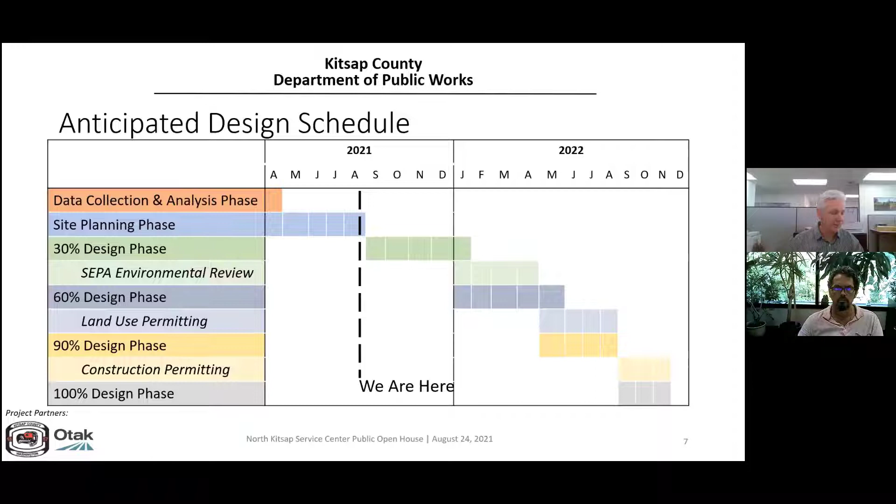So this is the schedule that we showed back in our first open house back in April. That time we were coming around to finishing the data collection analysis phase. As you'll see here in the blue Gantt bar chart, we're in the site planning phase. We're nearing the end of that phase here in August. And here's the subsequent phases. We'll get in this a little more detail: 30% design, 60, 90 final design, and the permitting that goes in between there.

So the first phase we talked about, the data collection and analysis phase, that's pretty much completed. So the deliverables, just a fancy word for reports and technical memoranda, that are completed include the preliminary geotechnical engineering report, conceptual hydrogeologic model report, critical area study, cultural resources assessment, and the zoning memorandum. So I'm going to talk a little bit more about the key findings in each of those reports and memoranda.

You may have some questions, and we can try to address them at the end. I am not the technical expert on all these discipline reports, but I do have an understanding of quite a bit. These reports will be on the county project website, so you can look at them in more detail.

So the preliminary geotechnical engineering report is prepared by Aspect Consulting, the geotechnical engineer on the Otak team. The findings are that the site is covered with shallow topsoil atop Vashon Till. Vashon Till is a low permeable soil, so water doesn't travel through it very fast at all.

One of the key findings is that it's not really suitable for stormwater infiltration, which is a preferred method to convey stormwater once it's processed on site. From a structural standpoint, foundations can be conventional. It's good for building foundations and other slabs, typically excavating down about 3.5 to 5 feet below ground surface, which is what BGS stands for. And the site soils can be used as structural fill.

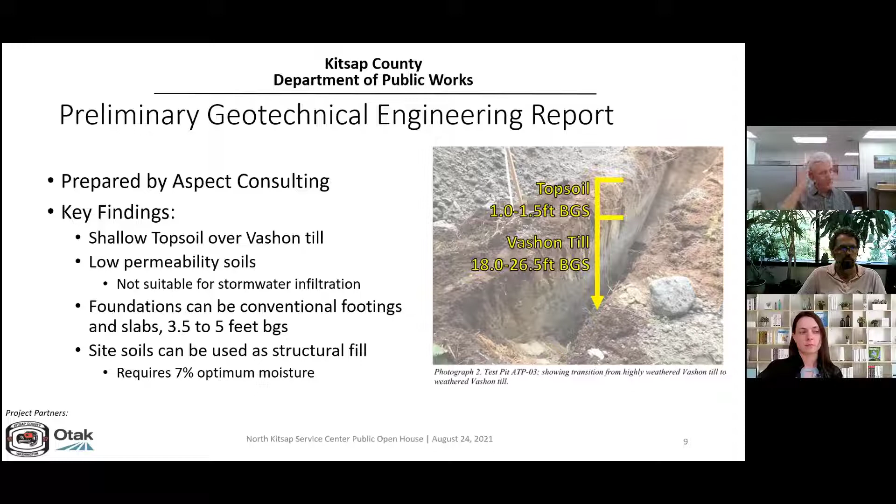So there'd be cut and fill happening on the site. Excavated materials can be used as fill, provided they meet the 7% optimum moisture. We're going to have to direct the contractor during construction to process those soils accordingly to get them to the optimum moisture. Some of the soils are up to 24% moisture now before they're placed, compacted, and graded.

So the conceptual hydrogeologic model report, again prepared by Aspect Consulting, informs engineering design much like the geotechnical report, but from a little bit different perspective. It used the same 8 test pits and 3 soil borings that were used for the geotechnical report, which gets a little bit different data, plus it uses publicly available regional data.

And there are future site activities that will require BMPs, otherwise known as best management practices, to protect the aquifer. So I'll go over just a couple of those.

Secondary containment and leak detection is required for petroleum tanks, above-grade petroleum tanks. The moderate risk waste facility needs a fire suppression system, and in the unlikely event of a fire in the future, it needs to hold about an hour's worth of fire suppression water, about 15,000 gallons, so there'll be a tank to hold that water. There will also be other tanks on site, such as diesel exhaust fluid, chip seal tank, brine tanks, and salt, so the containment needs to be appropriate for those uses.

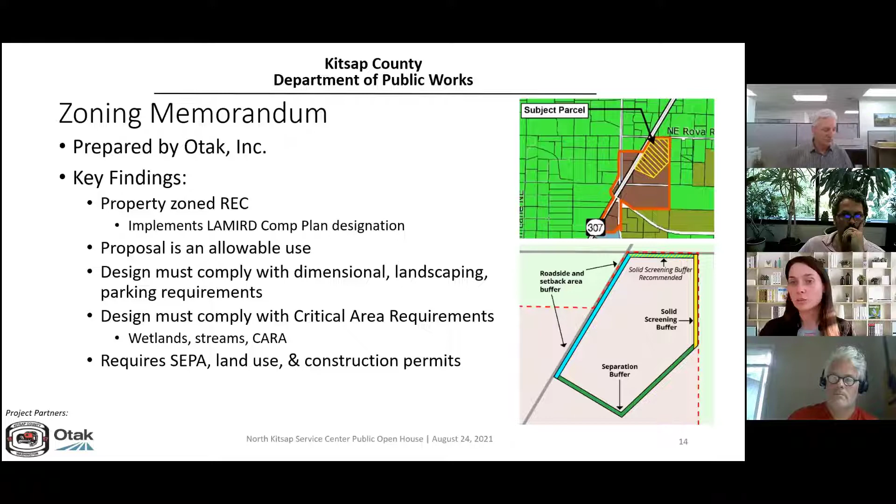All right, so that pretty much wraps up the key findings from the data collection and analysis phase. So like I said earlier, referring back to that schedule, we're closing in on the end of the site planning phase. So the activities we performed was confirming site and building program.

It's basically the plan and an inventory of the types of facilities that are needed on the site, both for household hazardous waste and road maintenance facilities. And so we confirmed the preliminary programming done by TCF Architects. That was done some time ago.

Mark and the team prepared 2 conceptual site alternatives. We have had some consultation with regulatory agencies. It's pretty much been limited to critical areas so far.

And as far as the deliverables go, there's the site plan alternatives analysis tech memo. We had a draft of that, submitted it to the county for their review a few weeks ago, August 4th. So some of the things that it highlights are the relative differences between the 2 site alternatives.

From the standpoint of different disciplines, it could be civil engineering, it could be landscape architecture, those types of things. It includes the decision matrix to help the team make a recommendation to the county, to help the county choose the preferred alternative, and it includes a relative cost estimate between the 2.

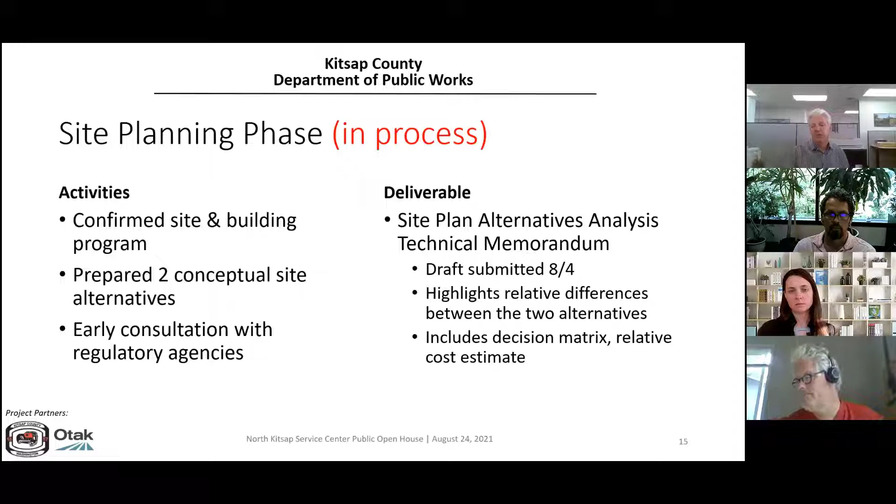So with that, I'm going to turn it over to Mark, and he can go in more depth about the 2 site plan alternatives. Thank you, Jeff. Appreciate that. Yeah, we've developed 2 site plan alternatives, and the way they're laid out is conceptually the same between the 2 alternatives. So I'll go over that.

They share a common spatial organization. On the northwest lower corner, a household hazardous waste facility is placed there for proximity to Bond Road, and visibility for residents to see. That area is intended to be accessed by the public and used by them. There is fencing that separates it from the remainder of the facility.

That is the most active portion on the site, and so we've located that as far away from adjoining neighbors as our site boundaries would allow. And then to the north is the maintenance facility and administration area.

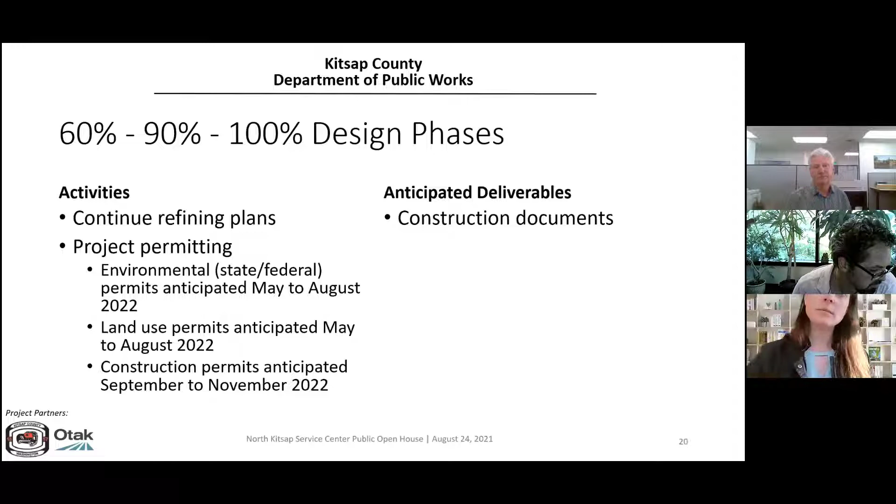Wanted Christina to go into a little more detail in terms of the open houses associated with the schedule. Yes, so there are still quite a few opportunities for public engagement throughout this process.

We mentioned at the beginning that the first open house, which was really a status update, was back in April, and here we are at our second open house in August. Going forward, we're planning additional open houses when our preferred alternative has advanced to 30% design, then from 30% to 60%, at 90% design, and prior to construction commencing.

In addition to the open houses, there are public comment periods you'll be able to participate in. We're proposing to start SEPA a little early after 30% design documents are available, and there's a public comment period associated with that. You're welcome to submit comments during the SEPA environmental review process. We also believe we'll need a land use entitlement with its own public comment period, and you're invited to submit comments when the public notice of application goes out.

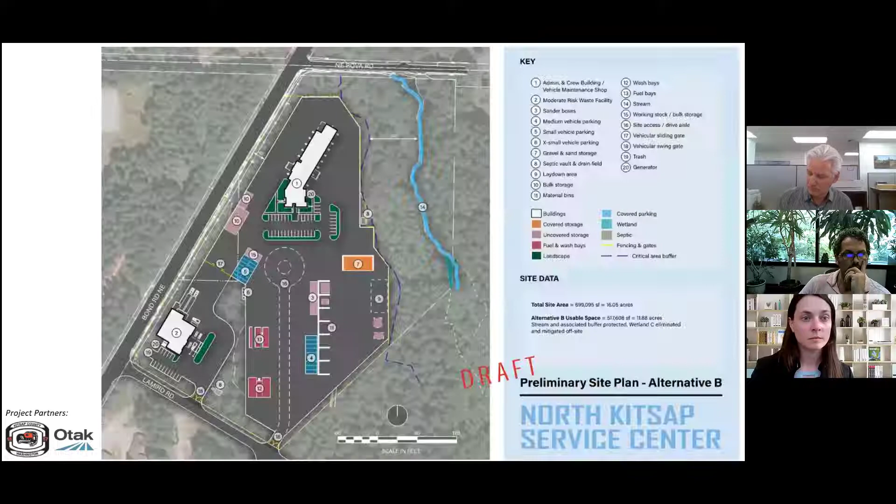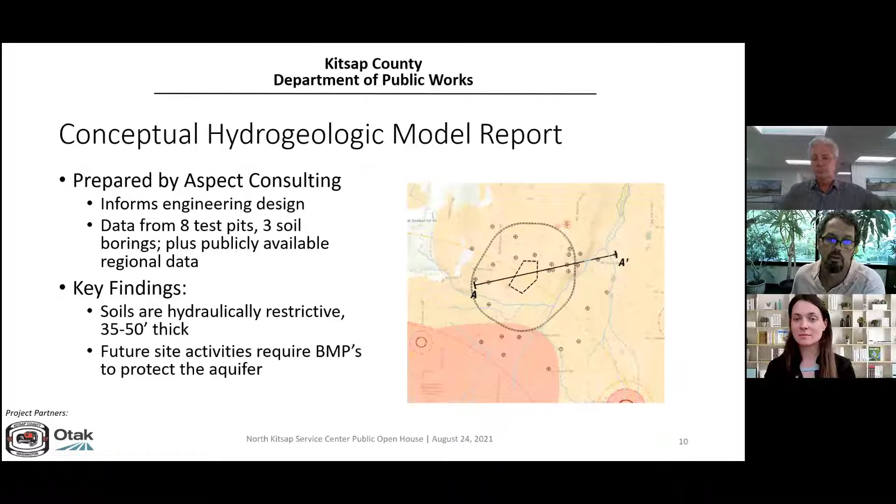Just state your pros and cons, your feelings and thoughts as you read through the reports—that'll help you state your position and argument as well. And those are feedback.

From an environmental point of view, I don't think you can ever take something Mother Nature's built and decide you can take it away from one site and build it somewhere else. I think that's always foolhardy. So I'm wondering how the county's going to view the possibility of taking out that wetland C and trying to move it somewhere else in the county, the state, or wherever it's mitigated to.

Speaking to that, it wasn't our intent to mitigate off-site—we were looking to mitigate on-site if we were going to affect wetland C. But as we studied the site, with the critical area setback to the stream and wetlands, the enhanced buffers, and everything you see on this screen, we understood it's going to be hard to mitigate on-site. So we searched for a mitigation bank, and surprisingly there's one down the road in the Gamble Creek watershed. So if we chose to mitigate off-site, it would be in the same riparian corridor, which we thought was a benefit.

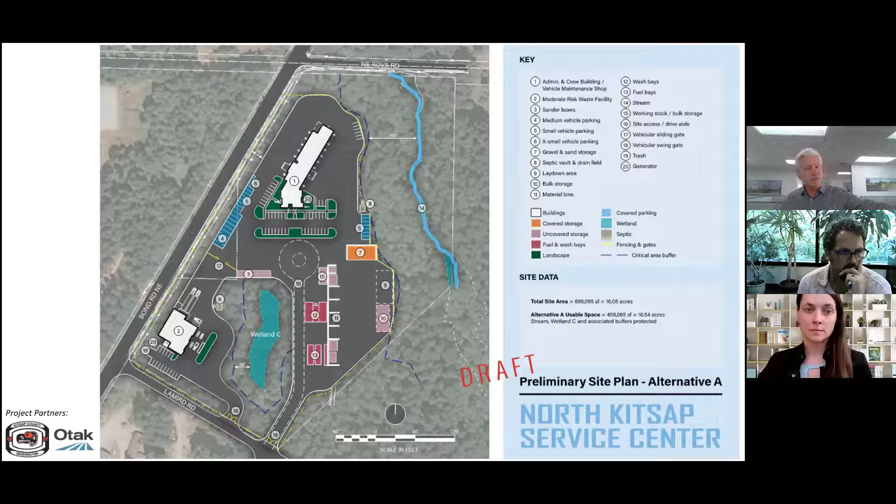As Mark said before, the main difference between alternative A and B is that alternative A leaves wetland C and its buffer alone, with some buffer averaging proposed. Alternative B does not leave wetland C and its buffer intact, obviously giving more space. So if alternative A is the selected alternative by the county, you leave wetland C and its buffer alone — you stay out of there.

Does anybody else want to clarify further on my statement?

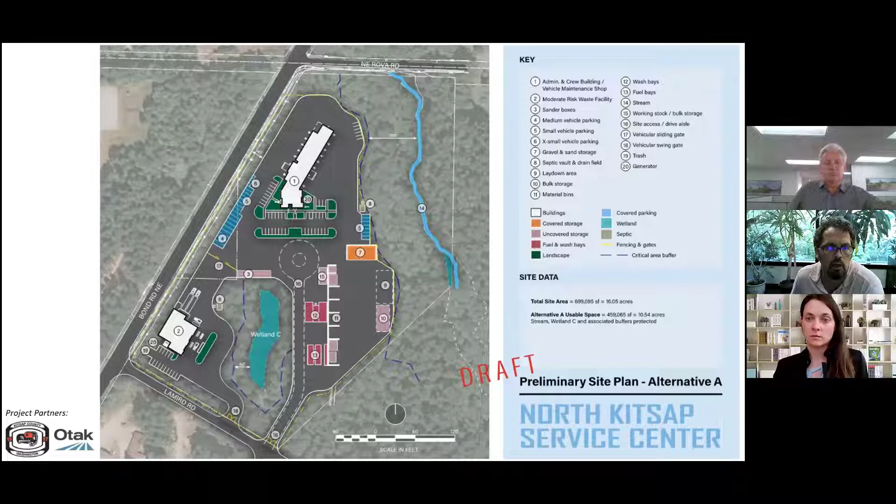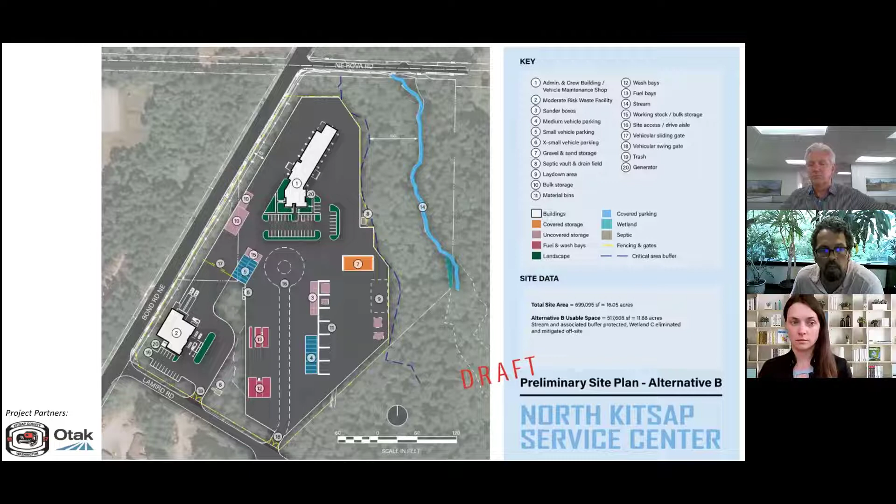I would just add one thing we have to consider that I don't think I mentioned, and that's future growth. Under alternative A, retaining wetland C restricts the site to what you see. Alternative B gives us a little more space for future growth. We're still noodling on that, trying to understand what growth will be like in the future and how road operations might be necessary to support that growth. So alternative B gives us more usable space to grow into. That's a factor we'll need to decide when we make the decision.

This is a really good question that Jacques or Eirik will be able to respond to.

Will this recording and slide deck be available afterwards, and where will it be posted?

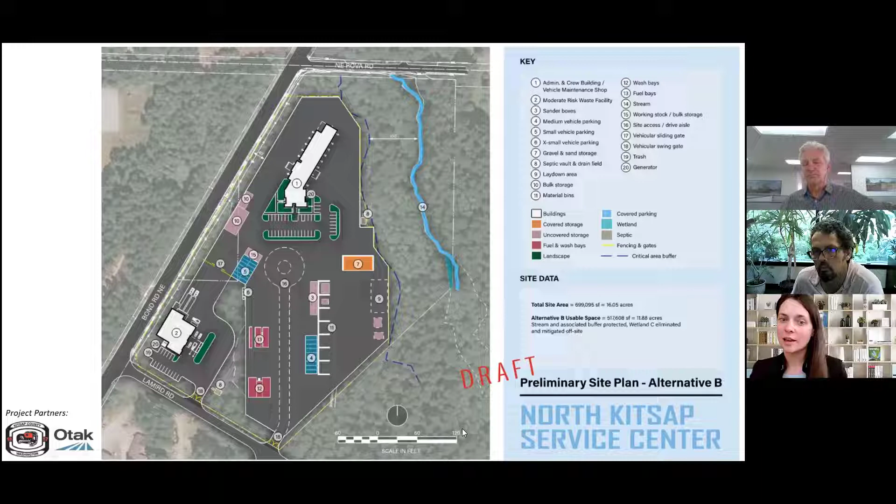Yes, it'll be posted. Go ahead, Eirik. This is Eirik O'Neill, Outreach Coordinator. The presentation and the Zoom recording will be posted on the project website, at the bottom of this page: kcowa.us/NKSC. If you go to that site tomorrow afternoon, you can find the presentation and the Zoom recording.

Now, Eirik, the previous meeting recording is also posted there as well, correct? Yes.

Thank you both. All right, we've got a couple more project-related questions. Does the environmental assessment include an evaluation of noxious weeds and weed containment associated with clearing the area?

Gamble Creek specifically, and other creeks in the area, are awash in reed canary grass and other noxious weeds. Reed canary grass responds quite favorably to increased runoff and sedimentation.

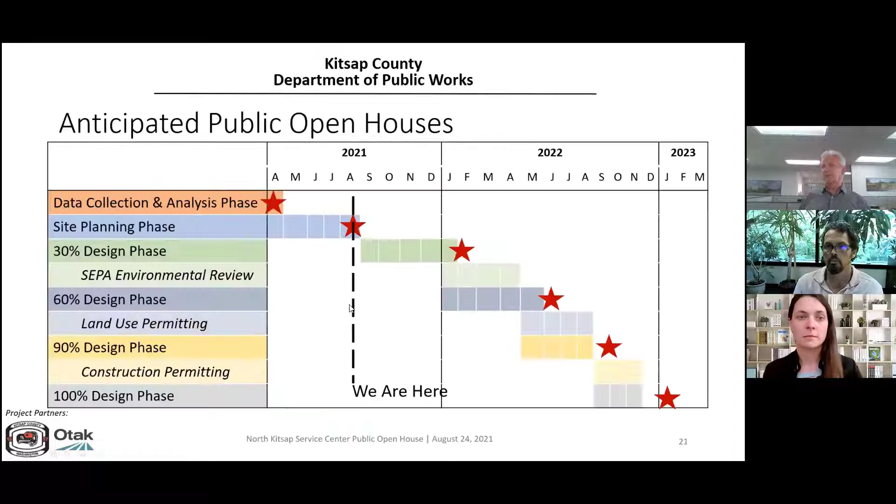Mark, you want to give that a shot? Talk about preserving the buffers and preserving, to the extent we can, forested areas and other areas that might be enhanced with landscaping.

Yeah, sure, Jeff. In the clearing of the site, essentially the area we clear will become an impervious surface, so we're not really creating new areas for vegetation or weeds to take hold. All of our stormwater is handled on site in vaults. As for the buffers themselves, we're enhancing them with native vegetation — densely planted buffers — so with care taken, I don't feel like a lot of invasives would come into the site as a result of this project.

So this, Jeff — there's... please go ahead.

The road department works closely with the noxious weed board and the noxious weed coordinator to manage noxious weeds within the right of way and on county property. We help fund that program, so she works very closely with my crew throughout the county to manage noxious weeds. It would be a similar case here, just like it is on all county properties.

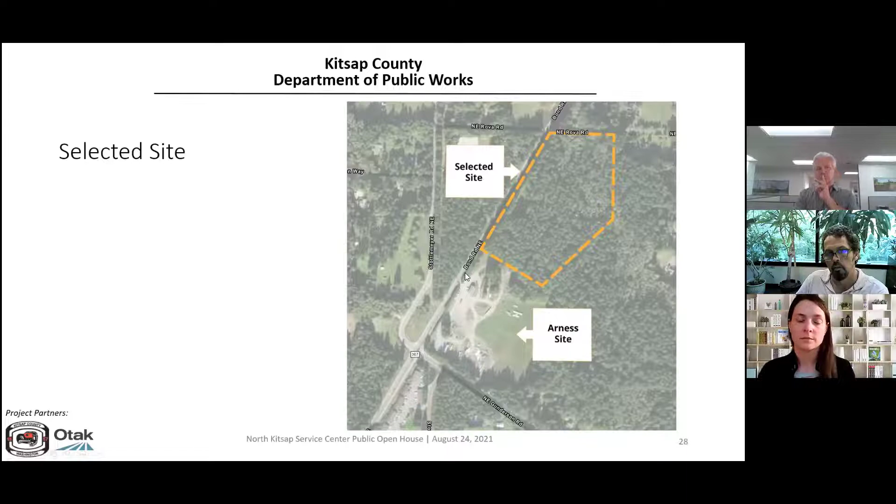So Jacques, if I could follow up on that for clarity - that's really meant to be an internal roadway to service the commercial area, not a public road that folks would use to avoid the lighted intersection.

It is intended to be a county roadway. We made that determination some time ago, but again, it's only going to be right in, right out, so we'll have to sign it. I've talked to our traffic engineer about it, and we'll have to figure out appropriate signage so we don't have that issue. But it is intended to be a county roadway.

At this point I don't have any more hands raised. I have one question, but the person asking had to drop off early and requested an email follow-up. If anyone else has follow-up questions or comments, or wants to state a preference for alternative A or alternative B, now would be a great time, or if there are any topics you'd like us to revisit from the presentation.

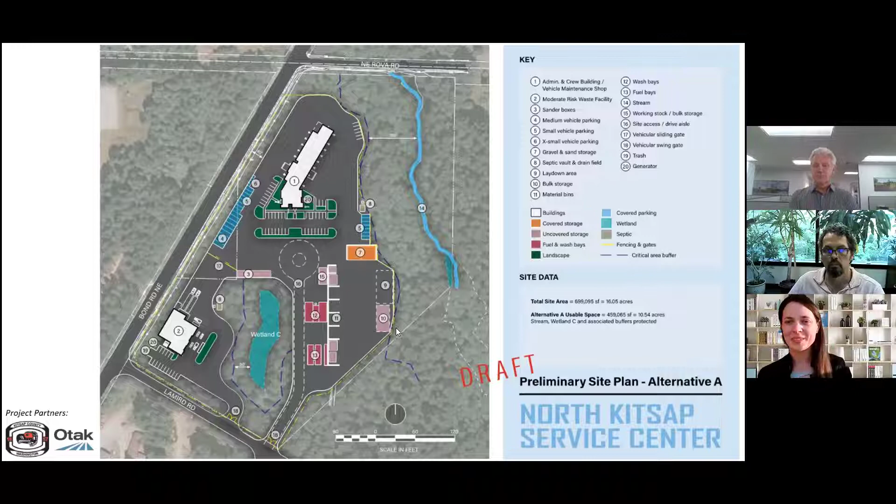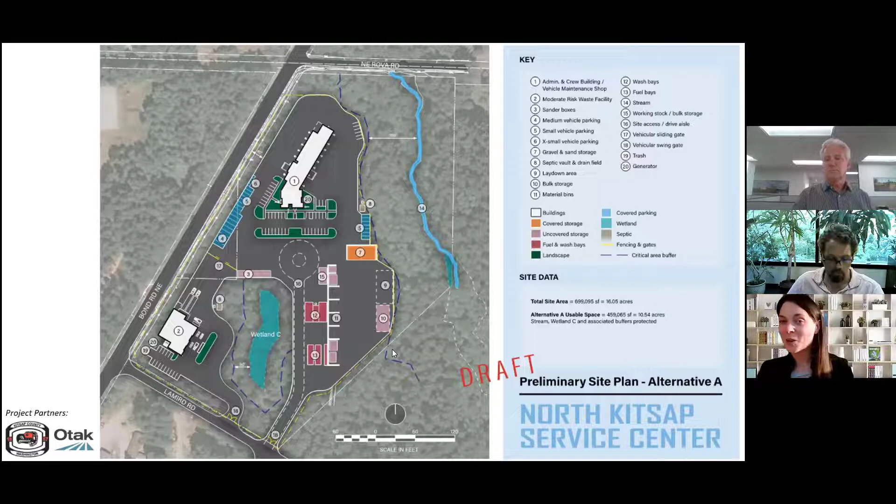All right, I'm not getting any other comments or questions, and I'm not getting any other raised hands.

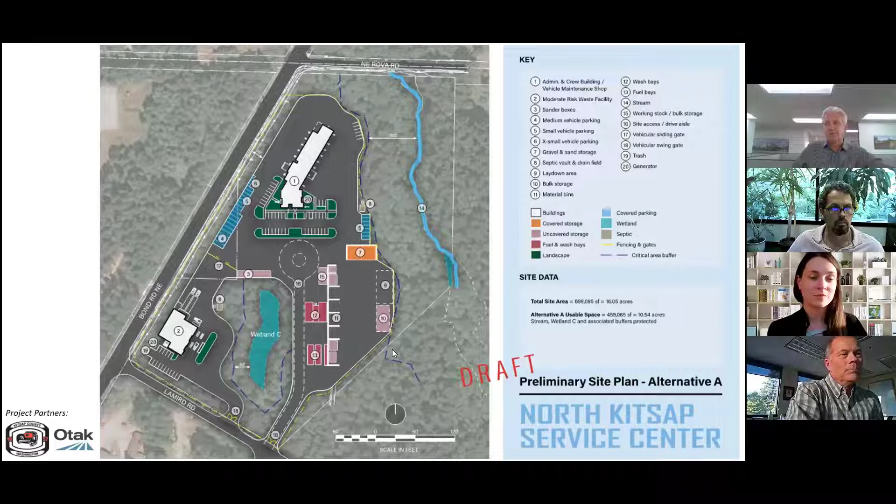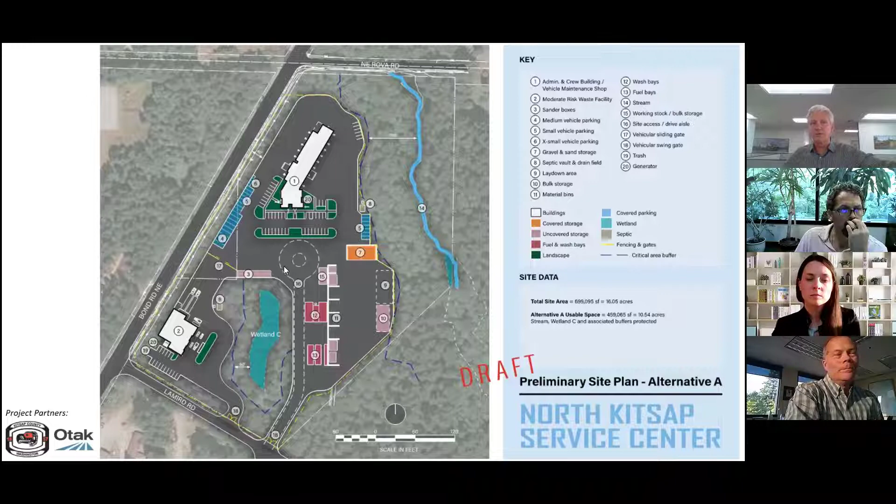This is Jeff. We mentioned there is public open house number 3 scheduled, planned for later this fall. We hope to share more detailed plans on the selected site alternative, and again welcome your feedback. It's great having people engaged in the process. So on behalf of Otak, thank you for attending.

Jacques, would you like to wrap it up? Oh, I'm sorry, sure, to interrupt. Nan has raised her hand again for an additional comment. Is that all right?

Yes. Nan, go ahead and unmute yourself. Please continue to U.S. mail the notices of these meetings to the neighboring residences. Okay, thanks Nan.

Last call for comments, questions, or raised hands.

Christina, this is Andrew Nelson. I would just like to take the opportunity to thank the Otak team for the great work so far - a lot of really good analysis in the site work and studies completed to date. I would like to invite the public to share this information with their neighbors and others who may be interested. Help us spread the word about this project, and public comment is very important.

The comment opportunities on our project page that Eric O'Neill referred to will be available for everybody as we go through this process. So if you didn't feel comfortable making a comment tonight, everybody's invited to make those comments on our project site, so we can include your thoughts in our decision process. Thanks everybody for participating tonight, and we'll look forward to the next discussion with you.